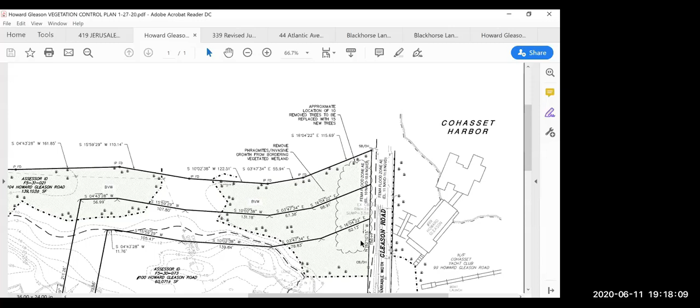The problem was with what the homeowner did and whoever he had work on it, we weren't aware this was done at the time. We found out about it after the fact, but when you mow down Phragmites at the wrong time, you can actually make them stronger. You have to specifically cut them at the right time when the plant is at its weakest, after it sort of foliates, not in the winter or late fall, where cutting it down could allow the plant to grow back stronger. So timing is important with how this gets done.

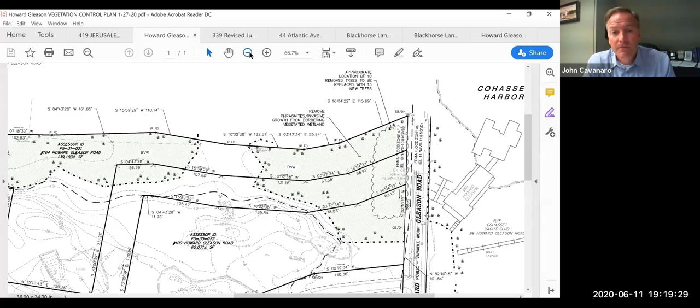Do you know when, John, do you think we would be able to have that? I think I could get it done probably within the next week or two. I won't be at the next hearing, I won't be available to attend. So the soonest I could be back would be the first hearing in July, but I could get that probably by next week. Okay, I think a detailed plan of the scheduling and what's going to be used would be helpful.

John, is there any particular reason why—I know there's an old order of conditions—but this whole area out here in the back, a good maybe 2 acres or so where Phragmites may be removed, is there any particular reason that all that wants to be removed or treated? It doesn't seem like it's blocking anyone's view or a nuisance at all. It just seems like it's there, in some really open space. So I'm curious as to the rationale of wanting to get back in there where it really can't be seen much, if at all, from anywhere.

Right, so a couple of reasons. One is honestly due to the lack of habitat quality that this monoculture results in. It completely overtakes any high quality native habitat whatsoever, so once it's there, it has no value. And it becomes a fire hazard, but more so—

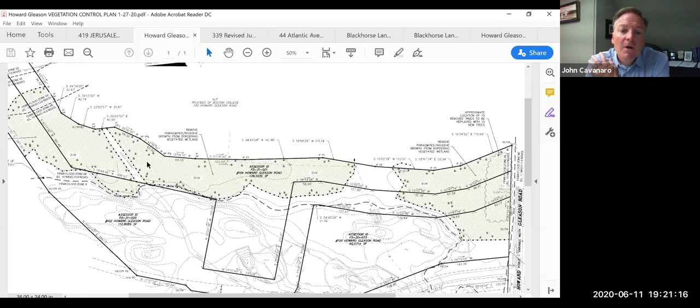We're fortunate that we have a break in the upland between these two stands, but the vegetation does spread. So the idea would be to eliminate all of it within proximity to itself so that there's less chance for it to recolonize. That's really it.

It's really not about a view. Go ahead.

Do you have a good feel on the first survey as far as the bordering property goes here, bordering the Boston College property, or the trustees of Boston College that goes along this line here, or would there be anything going up in that area? It seems like a pretty fine line. It actually comes up in slope, fairly steep. Not sure if it's at the actual toe of that slope, but that grade comes up fairly dramatically up to the Bellarmine property.

And so this is all pretty much in the BVW, in the wetland itself. Yeah, that's where Phragmites grows. So you're thinking, well certainly not today with the recent rains we had, but in a perfect world, maybe late July.

Yes, the proposed optimum time would be to begin the work. And that's when they think the Phragmites will be the weakest? Yes, after the tassels come out. And that's like the tops on top? Or is that when it starts? After that happens, the plant is at its most vulnerable stage.

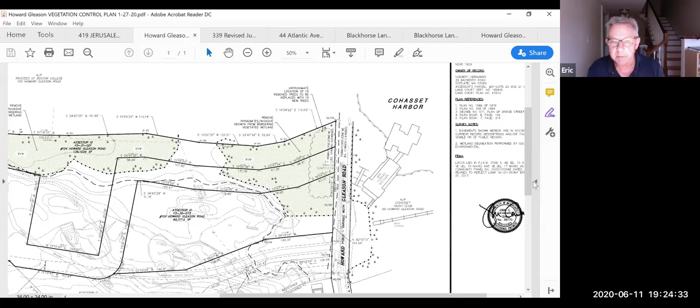And the pesticide you're going to use, John, is selective and is only going to damage the Phragmites and nothing else? Correct, yeah—it's an aquatic herbicide that has to get approved by DEP. It's essentially glyphosate, or a combination of other chemicals and glyphosate. It's been around for about 50 years—it's Roundup, John. It's Rodeo actually, but yeah, the active ingredient is Roundup. It's a carcinogen and all the other problems related to it.

So this is a very controversial—it's a controversial use, the glyphosate. It's been banned in California, I think. So is that going to affect any of the wildlife on that property? It'll kill anything it touches. Living creatures? I'm not sure about that, but any plant life glyphosate touches, whether it be Phragmites or trees or bushes or weeds, they're going to perish. You can read your own research on the negative effects of glyphosate on fish, small mammals, insects, and things like that. It's very controversial. I wouldn't say it should necessarily be banished, but it certainly doesn't get much favorable press nowadays.

Well, there's plenty of information out there about it. Most of the new information is negative. Okay, so time out, guys, here.

So I think what John had agreed to a little while ago was to provide a written report from either an engineer or someone more familiar with this, an expert in the field that would hopefully answer a lot of the questions that we may have here. So I think some of the questions we have will hopefully be answered, and we'll evaluate that report when it comes in, and we're happy to talk about that at the next meeting.

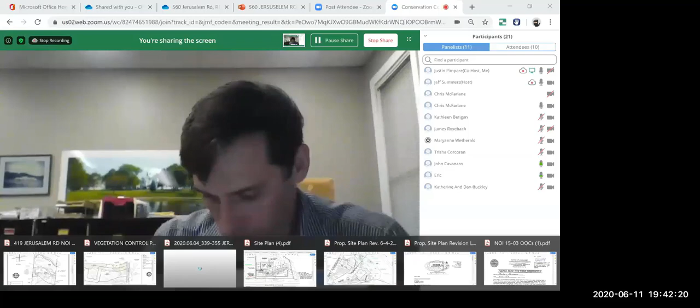This is a continued hearing from a previous hearing in May. Just to bring everybody up to speed, the commission did a site visit out there sometime last week, I believe last Thursday or Friday, and many of the members here tonight were present. This is a revised plan - hopefully I have the right revised plan up here now. If there's something else you want me to put up, John or Sean, please let me know. I think this is probably the plan you want us to work off, but if there's something else, let me know. I'll leave this right here and turn it over to you, and if you want me to share anything else, just let me know.

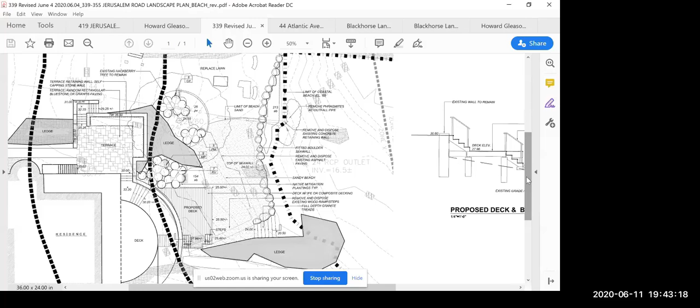Great, well thank you for putting up the plan, Jeff. Again, members of the commission, my name is John Cavanaro from Cavanaro Consulting in Norwell, and I'm here on behalf of the landowners, the Means, at 339 Jerusalem Road. As you mentioned, we had a site visit after the last hearing, and I think it was very helpful to see the site in person. Sometimes it's hard to differentiate some of the layers on these drawings in two dimensions. So we were able to identify that bituminous paved area, we looked at the existing retaining wall, the mature hackberry tree, we looked at the terrace area and the reconfiguration with respect to the positioning of the existing stairs, we looked at the deck. We taped that off, and I think we had a good feel for the scope and the size of the project.

Throughout the discussion, we got a sense that it may be beneficial to revise the plan slightly. We originally were not encroaching within the limit of the beach, but we extended the separation between the back of the beach and the face of the new retaining wall, bringing it deeper into the property by a couple of feet. Originally we were siting that large outcrop as the face of the new retaining wall with an arch between the ledge outcroppings. So we've kicked it into that large rock outcrop to create more separation from the back of the beach to the face of the wall.

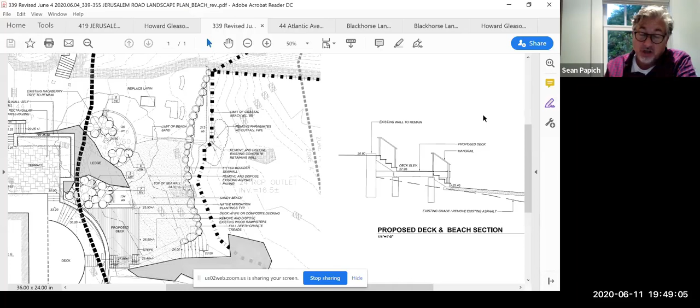John, did you ever determine what kind of tree was near the pipe? There was a large tree at the end. No, Maryanne, this is Sean speaking. We have not as of yet, but we'll do an inventory of all the plant material that will lie on the coastal bank side of the proposed stone seawall. We'll catalog that and make sure we know exactly what everything is, keeping all the native plants that are there. We intend to keep that large shrub, small tree, it was a little bit toward the north side of where the existing Phragmites was. So we intend to hold on to that plant. Anything that's on that side of the wall, we'll look at.

There are some other invasives in addition to the Phragmites, some honeysuckle and others, but we'll hold on to all the native, indigenous plants that are there.

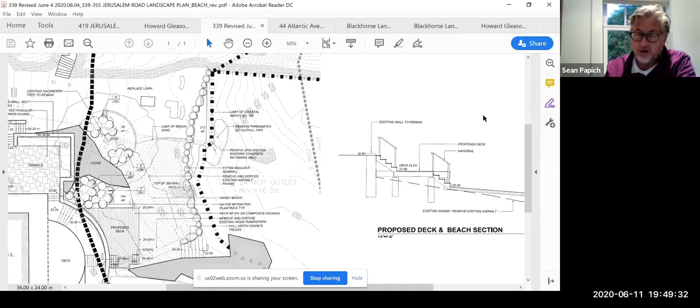John, it's my understanding that the Phragmites will prosper where you have the proper environmental conditions. How are you going to change those? How are you going to prevent the Phragmites from coming back in the future? You have the fresh water source, it's soggy, you have an area that's not going to be tended. What's to keep the Phragmites at bay?

I think honestly, hand pulling them on a regular basis. I don't think they've ever been touched, ever. There's been no maintenance out here whatsoever. Yeah, it's almost akin to cleaning the beach, you see what kind of debris and refuse is out there. This property has new ownership, and the plan is to maintain it and rehabilitate it to keep it in better condition. Everything takes maintenance, but the patch is small enough that it's manageable. It's not acres of Phragmites like the last job we had.

John, looking at the diagram we have here, could you describe where the edge of the asphalt is? I can visualize it because we were there, but I have trouble seeing that same edge in the drawing.

Sure, Sean, do you want to— can I grab the screen? I'm not sure if— I don't know if you could show where the edge is and also the rock outcropping. Yep, that was below that. Oh, I've just lost everything. No, hold on a minute, I have to do some— who wants to share this? John or Sean is going to share?

So for people that were out there, I'm happy to go back and actually show the photographs if that's helpful to anybody. I can show the photographs on site — would that help anybody? It'd be good, Jay, if you could. Please, yeah, bear with me here.

Hopefully you can see — there we go, there's probably a better one here, but I'll stop right there. Make a mental note, going back to the diagram, John referred to this as the hockey stick. This was the ramp that comes down and over, and the pavement follows along in this area here. I'll jump over to see if there are some other ones as well. And then, of course, this is where the Phragmites were, and the outfall pipe — it's over here somewhere on the other side of that wall.

And here's a better one — so here was that ledge outcrop. As far as the new stone wall, or boulder wall as we're calling it, John, does it start right down here at the end of the hockey stick? A little further down — the steps start there, Jay. They go down, and then the wall is at the end of the stairs, and it'll cut across sort of the first third of that boulder. Not behind the boulder, through the boulder. Yeah, through it.

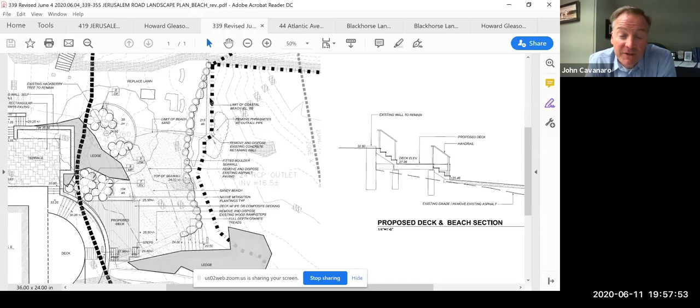I think the issue, Maryanne, is really that we're doing more than just replacing the wall here, as Chris was saying. We're taking the natural area below the asphalt and converting that from something wild and natural into a sandy beach, now to the west of the boulders. Am I incorrect, John? Well, we're actually removing a retaining wall that's failing and eliminating lawn adjacent to the beach, and we're creating more resource area potential for the beach to grow to the face and toe of the new retaining wall.

John, I was talking about to the west of that and south. If you look to the right of the asphalt, there's an area that's sort of natural wild growth between what was the former asphalt and now the new boulder wall. Let's go back to the photograph to look exactly at what it is.

Okay, hold on, let me go back to the photos. So, the boulders are going to start right along, let's say, the L. Is that not correct? What are we thinking? Right, yeah, that's where the wall's going, right there, the stone, all the boulders.

I don't think the beach where the stone beach is now will repopulate into stone, I don't see them getting a beach there. No, that's not what Eric was referring to. He's referring to what gets filled in behind the wall. When the wall gets built, the idea is that there would be a sandy beach behind it.

I would propose that the boulder wall run along the edge of what is currently asphalt, and the hockey stick runs straight across to where the crumbling wall is by the Canada geese. Come straight across and leave all that naturalness and wild growth down below, which is part of the natural flora of our beach.

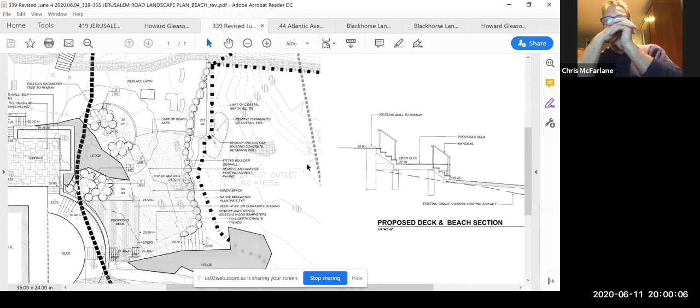So I'll chime in here. My feeling is, obviously, clearly there's a lot of work being done in the 50-foot buffer zone. However, I don't want to get into a long dialogue about the 50-foot buffer zone requiring a variance and the amount of work here. I think there are some things I see that are certainly an improvement. It's very unfortunate, and we saw this on site at, was it 485 or 495 Jerusalem, up the road a little bit a couple months back, where there was also a storm drain from up on the hill that unfortunately went through the owner's property and was affecting the rock wall out there.

So, to rebuild this wall here, I really have no problem with that. I think cutting it back a little bit is probably great in giving back some of the beach here. I think certainly the removal of the pavement here, which I think we're all in agreement with, is a huge benefit to the environment and will restore, and not allow that asphalt or any more crumbling or rock degradation to continue to occur right out onto the beach there. There has been some improvement with some native plantings here.

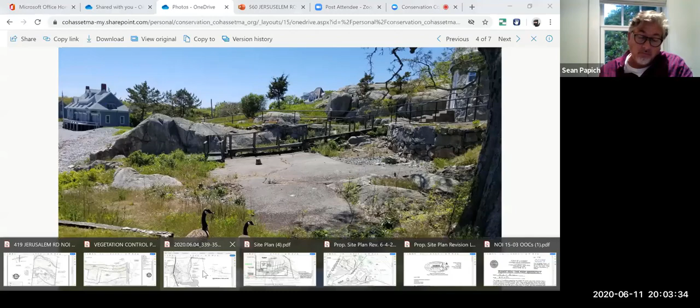I understand your point about bringing the wall back more. One thing I'd like to mention is that since the first meeting, we put together a larger scale landscape plan with more detail visible to the eye. We added about 370 square feet of plantings in the area at the Hackberry, right where the cursor is now. We had that for the site meeting, but not at the last meeting. So we kind of doubled the amount of plantings, if not a little more, from what was shown next to the deck previously. I just thought we should note that that hadn't been discussed.

Yeah, I think that's another improvement to this all. I don't want to set a precedent about rock walls here personally. I know we treat each application on its own merit, but we did approve a rock wall up the road a little bit. Again, there were extenuating circumstances given the storm drain there.

My comment is that I'd be ready to approve the project if I just saw the stone wall come back a little bit. There's going to be a lot of sandy fill in there—I'm not sure the exact amount, maybe 2 to 3 feet spread across this area. It's certainly in the hundreds of cubic yards of material being brought in. I don't know the exact number of cubic yards of fill, but it's quite a bit, I know it's sand. I think if it just pushed back a little on the other side of this ledge, we're giving away a lot. Again, I'm willing to support the project if this rock wall were cut back just a little bit. That's all.

I'd be more willing to support the project, Jay, if the rock wall was pushed back a lot. This is a project to remove some faulty, falling apart, unsafe, man-made materials—the asphalt, a wall. It's not, as I see it, a project justified in removing natural vegetation and converting it to beach. I would like to have that natural vegetation stay. I see the natural vegetation running along the eastern edge of the crumbling asphalt, coming over to where the Canada geese are, and everything to the left of that should stay the way it is. Take out the crumbling wall, and then you'd have your boulders going out, replacing the crumbling wall we see in the lower left-hand corner.

That would eliminate the negative effects of the crumbling infrastructure that man has put in there. Yeah, well, given that, I still think you're getting quite a bit of beach here, quite a bit of sandy area along there. I'll point out that along this area there are some plantings proposed, but that still allows for quite a bit of sandy beach.

So what about if we go back to the plan? Yep.

So tell me when that's up. Right, it's up.

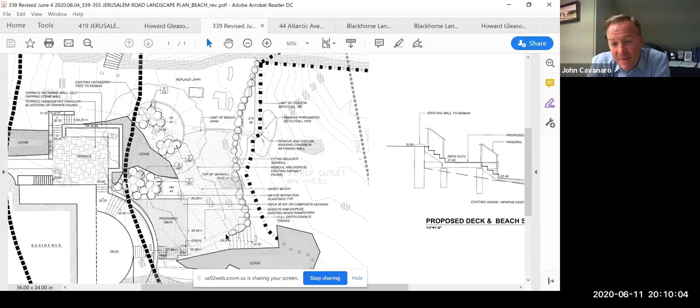I applaud you for bringing that back. You know, I was not looking to have the wall come all the way back over where the existing lawn was. I was just more concerned about it down this way. So essentially, we're going to kick it back to the back of the ledge instead of the front of the ledge, and then return it back.

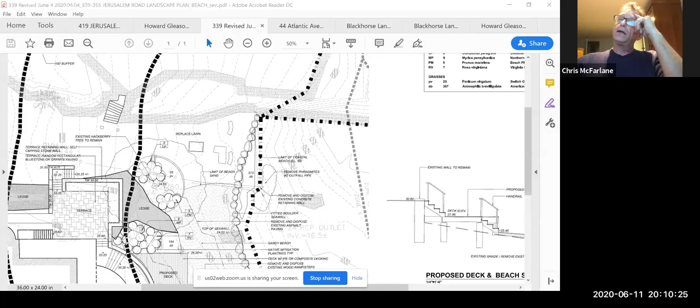Jay, on the top of your screen, do you have view options that you can give? Is there one that says allow viewer to annotate or something like that? Hold on a minute, let me share this. Hold a second here. You know, tonight's a lot different than other nights on this. I would love to be able to share it, but I don't have that capability here. Jeff, wait a minute, I don't know how to share that either, Jay. Sorry, again, I've built a million Zoom platforms and it's not allowing us to do it.

Certainly something to look forward to or iron out here moving forward. Any comments on that? I mean, it sounds like we're close to trying to move this forward here with a condition, and I'm happy with that, and I'm good with that.

John, how long? First of all, are there any comments to the proposal of having a revised plan based on the comments we've just discussed?

Jay, what you're saying is almost unintelligible. I apologize for that. Very good, there, you're doing better. Can you hear me now? Yeah, all right.

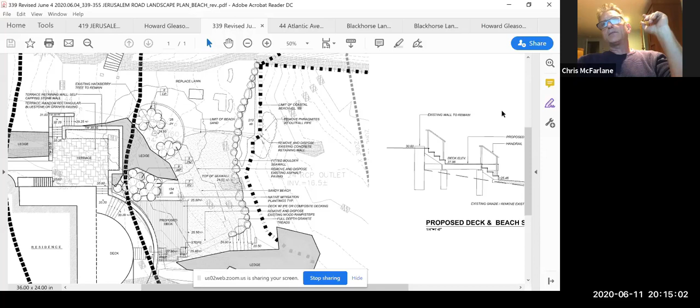We can do that. We can document that. We would intend to document that for you. Even if it's as simple as an outline like you've done for the ledge, with a hatch over it that says this area of planting to remain, or a limit of work. I think we talked about that early on, that he was going to do that. We did. That's acceptable.

Okay. All right, any further comments here?

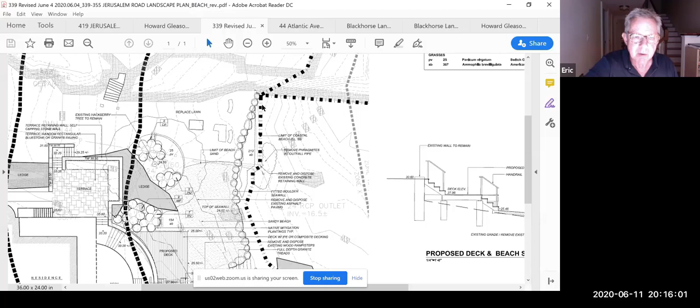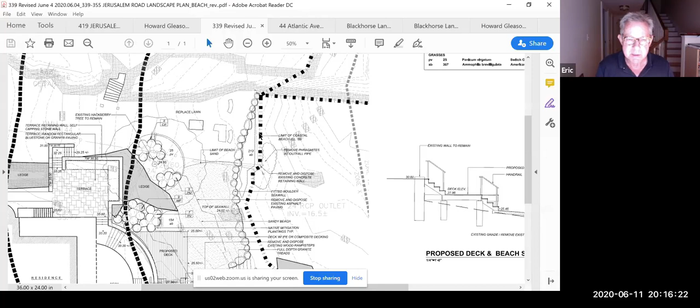It's an area that lacks definition right now, and I think we need some clarity as to what's going to be there afterwards. Okay, including the new position of the boulders. Correct. Right, yeah, I have a couple of conditions here which I'll restate in a minute, but before I do, I want to ask Jeff for any additional comments.

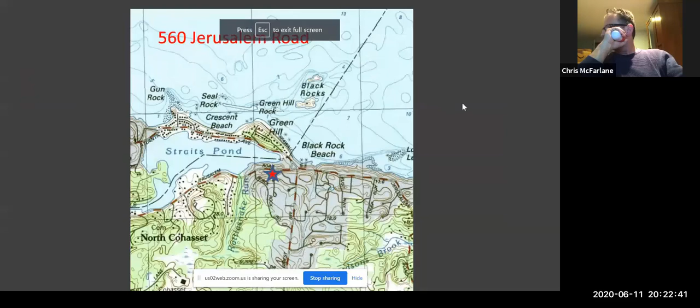Good evening. So, just so you know, I did read into the record already the notice of public hearing, so no need to go do that again. David, if you weren't with us earlier, I did read into the record the notice of public hearing. I believe I did, so we're good to go.

We're just coming back to 560 Jerusalem Road. And just for the record, David, your name and affiliation, and I'll turn it over to you. You just let me know when you want me to skip to the next slide here. I believe we also have some pictures, and I'm happy to go from here.

This should be fairly brief. My name is Dave Crispin. I'm a civil engineer and land surveyor with the BSC Group. Kathy and Dan Buckley are with us also, the new owners. They purchased this last fall. Believe it or not, Jeff and I walked this site last fall, so it took a little while to get through the process and figure this out. We are at the eastern end of Straits Pond on the southerly side of Jerusalem Road.

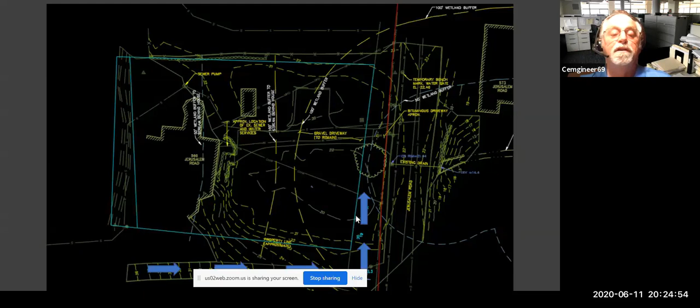This is just a screenshot of the CAD file, but what I want you to see at the bottom of the screen is a driveway that goes up the hill. Those blue arrows represent the surface runoff that comes down the driveway, takes a left, and goes right into the front lawn of the Buckleys.

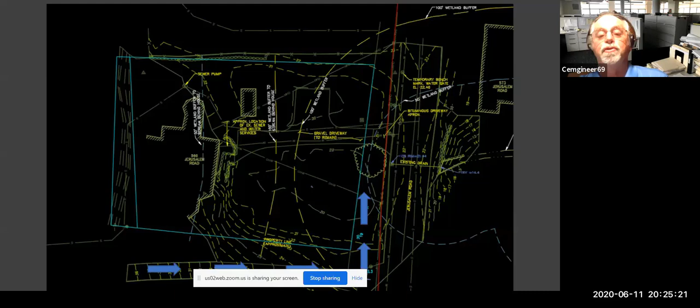It's kind of because of the way they graded and paved the apron at the bottom of the driveway, but it's not a big deal. It's easily solvable, and to deal with that we thought we'd just leave well enough alone and take care of the problem for the area. So the next slide shows you what happens. If you can go to the next one.

That's a pretty cartoonish representation of what the front yard does pretty much every spring and winter. It comes down and it does not percolate. The soils there are terrible. We looked at the test pit logs from the old septic systems, and it's basically till. So that front elliptoid there is a bowl, for lack of any better term.

Not to put words in the mouths of the abutters, but I think the words were tired of looking at the flood that sits there ad nauseum, not to mention the detriment to the front lawn, because it does in fact kill the lawn many seasons, many years each season.

Next slide. So what are we going to do? You remember the driveway coming down the bottom of the slide? We're going to build a little 2-foot wide cobble channel into a forebay. Not that they sand that driveway heavily, but there was evidence of some sand.

So I thought we'd do the right thing and put a forebay in there and trap that sand. Then it overflows into a rain garden, which is about 18 inches deep. And then there is a 4-inch diameter pipe coming out of this little yard drain. I'll show a picture of that next.

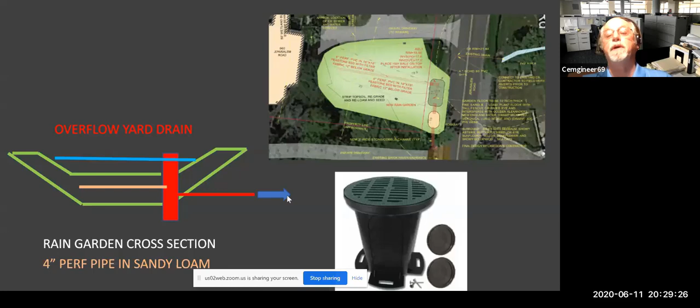The orange line on the cross section on the left is that subsurface drain that would let the water soak through the sandy loam and come out, and then it goes to that pipe that we know is there. We're going to have to discover that when we get to a construction stage, but we know it's there. We know it's 43.5 feet from the end of the pipe. I think that's it in a nutshell. The next one just says questions.

Okay, thank you. So we're hoping for a negative determination if that's possible. Jeff, I know you have some pictures.

I don't know if it's worth sharing the pictures, but I'll go back here a little bit. The pictures right there really kind of say a lot. Jeff, comments to this one?

The only reason that we're in any buffer zones here is because across the street on the other side of Jerusalem Road is an intermittent stream, and behind the house is a small intermittent stream also. So those are the closest resource areas, and that's why they're here at all.

I do like the water treatment, I think it's great - the forebay to trap solid particulate matter, and then the rain garden to reduce the pollutant load. I don't think a lot of people would include that, and I'm happy to see that here in this proposal.

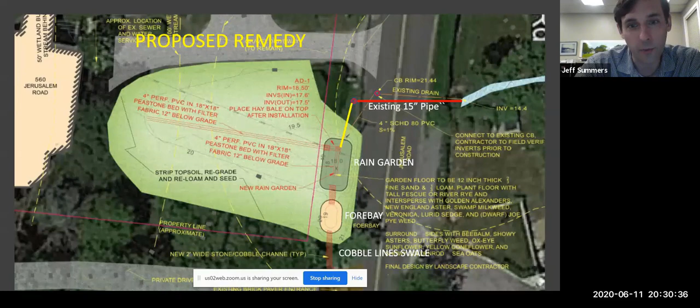I don't live too far from the house, and I've seen this at its worst. I probably walk by here at least once or twice a day, and certainly applaud you for trying to take care of the water. I know the water comes in from a couple different angles here and unfortunately hits that low-lying area in the front yard. So I agree, I'd probably want to be doing something over there as well. Good for you to try and remedy the situation here.

Comments from the commission? Any other comments? Yeah, I think maybe I missed something here. You have the existing pipe - I believe you said it's 43 feet long. 43 feet from the right end, right there where Jeff just had it. There's a head wall over there. What's at the far end of the pipe?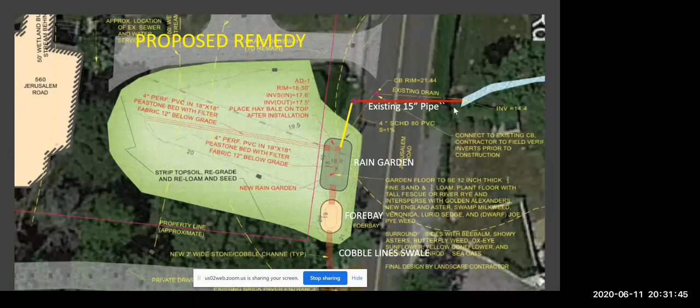I missed that - to the left or to the right? To the right, over here, Eric. That's the intermittent stream that flows down to the pond. Okay, so you'll be dumping the water that's currently collecting on the lawn into the stream directly. Exactly. At a very controlled rate.

I kind of suspect that at the left end of that, when we get to it, we're going to find some kind of a dry well or something that was probably put there, I'm guessing when they built Jerusalem Road. I don't know what we're going to expect. The pipe is vitrified clay, 15-inch. I haven't put any of that in my lifetime, and I've been doing this for 45 years, so I think this is a pretty old pipe.

I've passed this property for a number of years, and it's always been a view to see all that lake out there, so this is an improvement, it looks like. And second, the plan - this is a really nice plan. I just have to comment on the engineer on it - we don't usually see it so detailed, and I really like how it's explained. I hope other people would continue to do stuff like this.

Third, I just wanted to know how much elevation do you think you're going to be putting in, the grade, on the lawn? Around the perimeter it does not change at all. In the center line where that reddish line going left to right is, we're probably going to change it from 4 inches to maybe a foot at the far right end, and the rain garden's a couple of feet deep. I'm thinking there might be 75 yards worth of earthwork here - we'll strip the topsoil, stockpile it, regrade it, take away a little bit, and put it back together again.

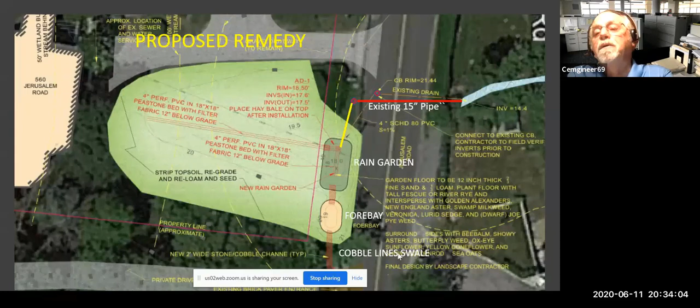Just a reminder, the rain garden has to be maintained forever - the homeowner has to maintain it to keep it working, it doesn't just stay that way. There's an obligation, this is true, and it's designed intentionally for minimal maintenance. These are perennials that would be in there. Like I said, I don't expect a lot of sand coming off of that private driveway. My discussions with the Buckleys were that the forebay, they might get a wheelbarrow of sand every 4 or 5 years. It's not going to be a big, huge maintenance item.

You'll know if there's a failure with the design when you start to see the water backing up all over again. Hopefully that doesn't happen.

To be clear, if we get a 5-inch thunderstorm, there's going to be a puddle in the front yard. It just might take a day to go down instead of 3 weeks. There goes your ice skating rink. Lake Buckley, our friends call it - not lovingly. We haven't mapped it yet.

Any further comments here? All right, Jeff has requested a negative determination. Is this a negative? I don't see any conditions being placed on it, or not hearing any. Jerry, sorry, I was muted.

I have a couple questions real quick. You mentioned that if there was a certain size storm it would still take time to get rid of. Is that because of the capacity of the 4-inch pipe leaving the rain garden? Yes, it's only a 4-inch line going out of there on purpose, very restricted. Have you calculated how much volume a 1-inch storm would actually create? We honestly didn't go to that expense for this.

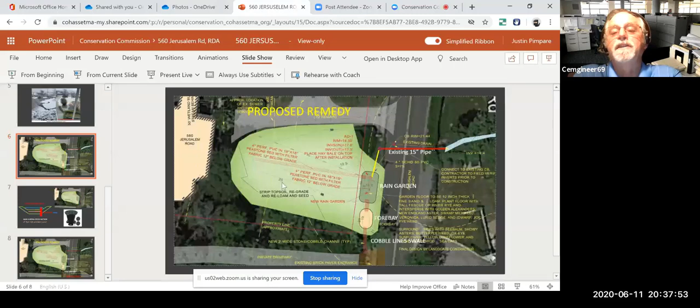When the house was built, I'm guessing they diverted that stream maybe to this culvert, and pushed it off to the north, or to the west rather. There's so many streams going back here - of course you have Rattlesnake Run, but there's so many areas that are wet that come off the hill and the hillside that flow down through there. It's tough to say.

Okay, all right. Any further comments? No. All right, Jeff, I'm not hearing any special conditions being placed here - is that just a negative 2? Jeff, you're muted. You're muted, Jeff.

So, sorry about that. I just wanted to say there's no comments in the Q&A regarding this, and it would be a -2.

Jay Pimpare, I'd like to make a motion to issue a -2 determination on the RDA for 560 Jerusalem Road.

Do I hear a second? Seconded by Chris McFarland. We'll do this by roll call vote. Jay Pimpare, aye. Chris McFarland, aye. Eric Eisenhower, aye. Marianne Weatherald, aye. James Roseback, aye. Trish Grady, aye. Okay, that vote passes 6-0.

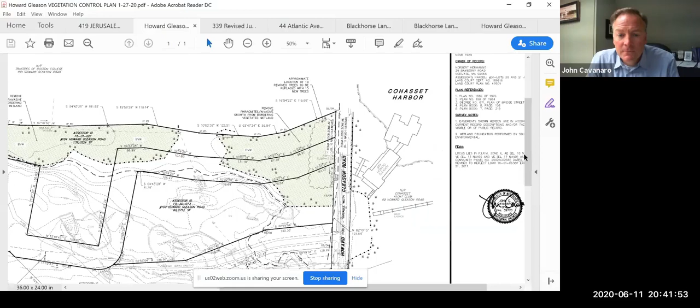All right, John, I've just punched up the site plan. Let me know if that's sufficient for you. Is that good enough? Yes, perfect. Thank you, Jay. Okay, I'll leave it right there. Thank you.

Thank you, members of the commission. Again, John Cavanaro from Cavanaro Consulting in Norwell on behalf of Barry Cohen, the owner of 419 Jerusalem Road. The Cohens purchased 419 recently, and we filed a notice of intent to do some work in the front of the property. This is an ocean-facing property that has a coastal bank on the ocean side, back of lawn. Between the top of the coastal bank and floodplain, there's a pool, landscape, then the back of the house, and then we're on the front side of the house that faces Jerusalem Road. The lot slopes up from the dwelling to the road. This is a Royal Barry Wills Cape home that sits sort of mid-span of the lot.

So the resource area, as I mentioned, is on the back side of the house. All this work is on the front side. It'll be accessed from the existing paved driveway, and there are a couple of small additions going from left to right. There's about a 150 square foot addition that will be located conforming and within the side yard setback. It'll be a one-story addition located within 15 feet of the side yard. So that's a conforming addition. No other relief is required there.

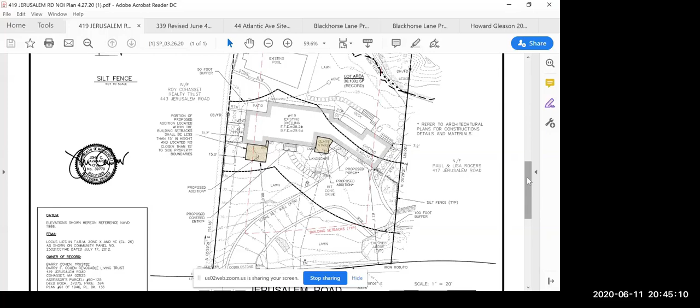All right, Jeff, comments on this one? So I just want to echo what John said. It's a minimal amount of work, and it's already into built areas - the atrium, the steps, the one addition into the lawn, which is on the other side of the resource area, and then the deck.

While I'm speaking, I had a quick question for John. What's that deck going to be like? Is it going to be a suspended deck with a couple of sonotubes, or is it going to be flat on the ground? So the porch? Yeah, the porch. Yeah, so that's just sonotubes, it won't be a foundation, just suspended on sonotubes.

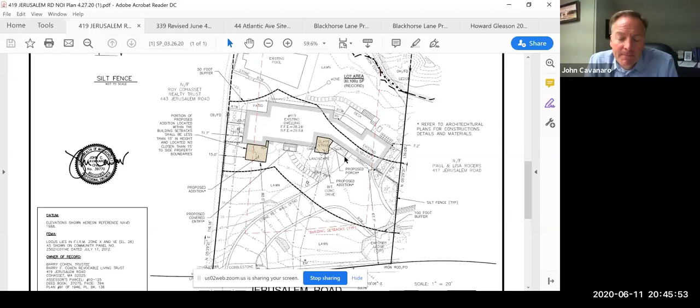Okay, and then the little bump out here. Correct. Okay, so it's all one story. Will they just have to cut into the roof line here, John? Yeah, so we cut into the roof line a little bit, but not exceeding the overall height there. It won't be triggering any zoning relief, correct?

Yeah, sorry Jeff, I didn't know if you had any further comment. No, okay. My quick comments - this is a beautiful home. Everything is pretty much outside of the 50. As John mentioned, it doesn't require a stormwater permit because it's below the threshold. If you've been by this house...

It was one of three houses in a row. The other two were unfortunately knocked down and rebuilt, and what the middle one looks like right beside it. When I saw the for sale sign go up on this one, my first impression was, oh no. If the new owners please keep this house as best they can, selfishly speaking. So I applaud the new owners for keeping the home pretty much as is with minimal work. And thank you to the homeowner if you're out there listening, for not knocking this down and building something other than what's currently there. I really don't have any comments to this project personally.

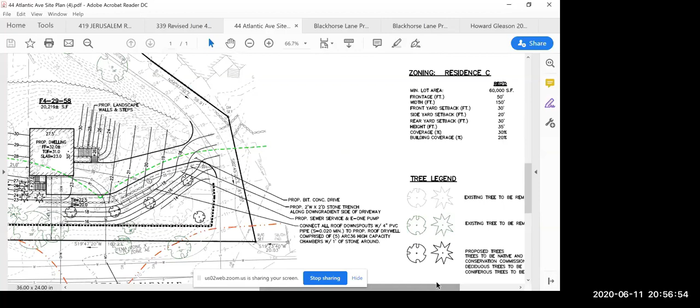So Jeff, going to the tree legend, the color green there. So these trees, the larger trees in the front, will remain. Can I make a comment moving forward? Can you make these a pink, brown, or blue, some other color to make a better distinction between what's to be removed and what's to remain? It's tough to point them all out. I see the 50-foot wetland is red and we've got green, and the red really sticks out. So moving forward on these plans, before I forget, color code these in clear bolded colors that stick out for what's to remain and what's to be removed. Sure, yeah, we can do that in the future.

Jeff, before I open up to other comments, Jeff Summers, comments on this one? Jeff, this is Maryanne. Well Jeff, this is Maryanne.

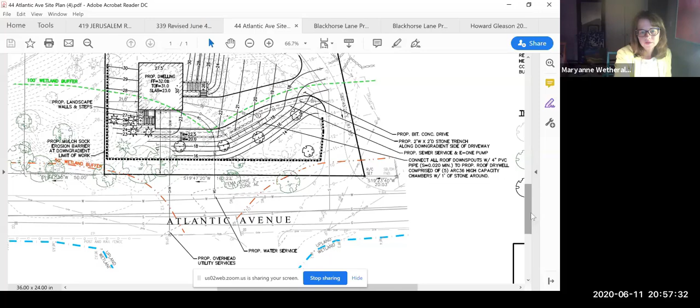What is the dotted line here right before Atlantic Ave? Is that the stone wall you see along Atlantic? There's a stone wall that seems to be about where the property is. If you look at the 50-foot wetland buffer label in red, directly below that is a stone wall line type. So then what's this dotted line? That bold dotted line is the limit of work where there'll be an erosion control barrier. That's the silt sock right here. Oh okay, the silt sock coming around.

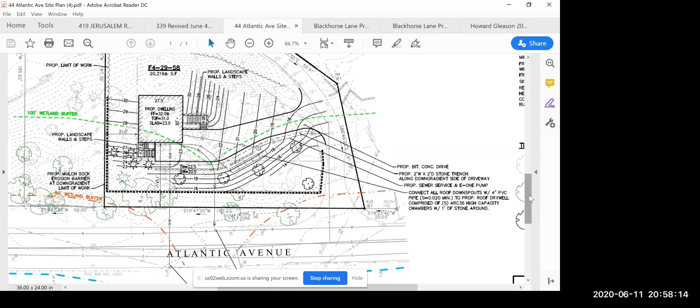I know it's hard when you drive up there to actually see it. So the rock wall you're referring to is right over here, and then that existing driveway. The existing driveway comes up and goes around to a house out in the back. It does a loop and comes back to Atlantic Ave.

Yeah, there is so much ledge on this property. I was kind of surprised by this one. It's a beautiful ledge. On top there's a stone wall, like on this property. There's a cement wall, seems to be holding back the property. As you go up the road, is there going to be any work done up there as you proceed up higher?

No, that lawn area, you can actually see the retaining wall shown on the plan. Those retaining walls were built when they put in a septic system for the abutting house, which is now connected to sewer. And for the most part, that land is off-site.

So I see that's still part of the property, the proposed limit of work. So for all commissioners, see the proposed limit of work, Jeff has it, the squiggly line here I'll call it. There's no disturbance in this area, the two trees shaded in green are to remain. That retaining wall up here will remain, and again this whole area will not be disturbed at all. The limit of work follows this squiggly little line here. Right, I was just concerned about the shifting of taking away so much.

Yeah, seems like, how are you going to be blasting to get through into this driveway? Or what's your plan? So the driveway will be filled. There's a flat area at the base of all the ledge in the back, and this driveway when you come up is in an area of fill. The only ledge removal is a small amount for the basement of this house. The grade's coming down about 2 feet.

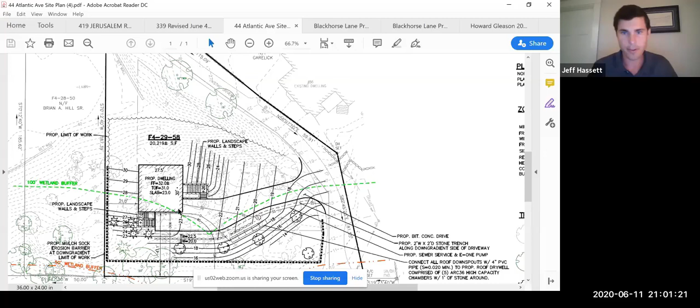And you're along a scenic road too, so you can't clear between 5 and 15 feet unless you get the planning board to approve of that. Have you talked to them? We have not spoken to them, but we are not working within the front part right along Atlantic Ave. We're keeping that wooded area between the street and the work area.

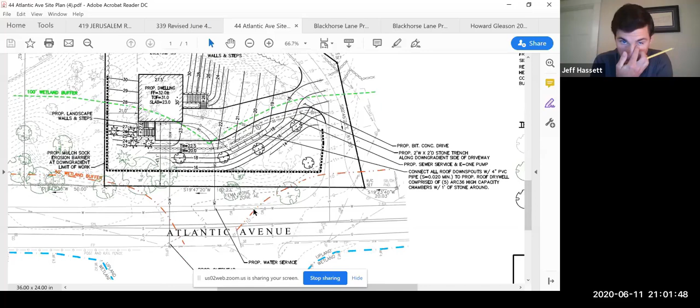Yeah, I think looking at this, I don't have the scale here. I'm sure the scale is off at the bottom point. It rises up a bit, I think. Yeah, so there you go.

So what's a 1 to 20 scale? I think you're talking at least 20 feet from here to there, Jeff. I mean, if you want to get a ruler out, or know that offhand, but it looks like you're at least 20 feet from the road here before the actual clearing starts, or at least where the silt sock is. Yeah, I'm getting about 22 feet from the edge of pavement.

Okay, so good comment, but hopefully it doesn't really apply here, thankfully.

How big is the house again, Jeff? 20 by 30? 30 by 27 and a half. 30 by 20, so we're a little less than 900 square feet, and with 2 floors? Yeah, story and a half.

So to get into the house, you're actually going to have to, I assume, is there a slab, an underground garage, or a garage on the bottom floor? Yeah, there'll be a door right there into the basement, and then those front steps and the rear steps will be hardscaped walkways going up 8 feet to the first floor.

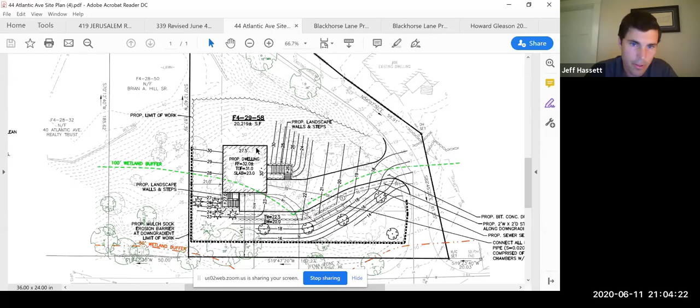Yeah, so the high point in the property is right where the proposed limit of work is. So you have about 30 feet of runoff coming towards the house. It won't be a ton of water, but it certainly is something to be concerned about. It will be kind of the fine grading to divert the water around the house, and then also waterproofing the basement.

Definitely. Yeah, the intent of the applicant is not to finish that basement. In fact, it'll probably have the foundation just pinned to the ledge, so there'll be an exposed ledge on the uphill side. Yeah.

So where is the drain? You have roof runoff going into drains on 4 corners, or can you go over that, or the mitigation of where you're directing the water to is?

Yep, so there will be downspouts in the front, I guess the corners closest to Atlantic Ave. It's only a 30-foot run, so you can pitch the gutters from the other side of the building to that side. And then from there, it'll be piped with a 4-inch pipe to the drywell system along the edge of the driveway.

Do you think that will capture everything, or do you need more than that? That will capture all of the runoff. It will overflow at the downspout right at the corner of the house during bigger storm events. So the intent of it is to make it big enough that we're reducing the amount of runoff from the property. We don't have to hold back all of the runoff from the roof.

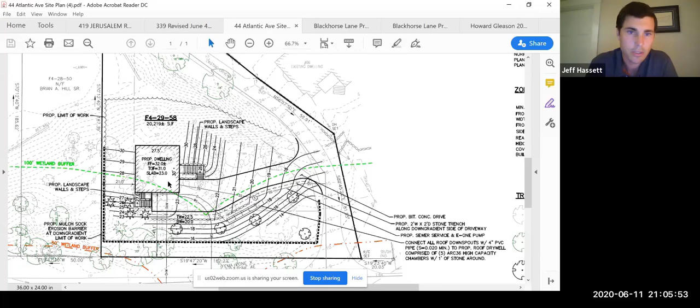Jeff Summers, comments on this one? So I just wanted to say that the resource, going back to the resource area, it's on the other side of Atlantic Avenue, is Treats Pond, and the actual wetland is basically a buffer to Treats Pond. So that's what the actual resource area is.

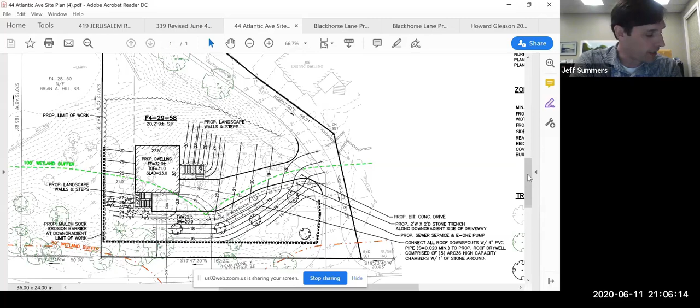As Jeff Hassett said, the entire lot is vegetated as is, and you can pretty much assume everything will be removed in that limit of work area. The vegetation along the front edge will remain, and then they'll have whatever was not the 9 trees planted along the roadway, I guess probably for privacy eventually. That was the only comment I have.

There is a question from the audience. I don't know if you want to wait or address that now. Could I speak first, please? Sure.

So, could you explain to us in simplest terms, you have a heavily wooded site which you're removing, my quick math, 220 inches of caliper of trees in I think you said 17 or 19 trees. And I have to assume, and maybe erroneously, which is why I'm asking the question, that the land is kind of reclassified for stormwater management when you take down that many trees. Am I correct or incorrect?

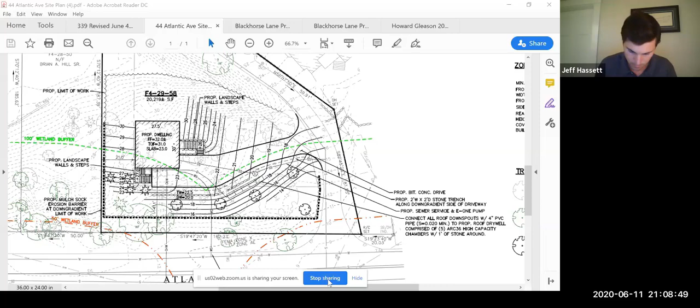We have a comment from the audience here, and I know I stopped sharing my screen. It's a comment from one of the abutters. A couple questions here. I'll read the questions in the comment and we can circle back. The first question was how many trees will be removed? The second question is where will the runoff go? And then the comment is Treats Pond has caused serious flooding at 91 and 95 Atlantic Ave for many years. The flooding continues today. Any new construction and clearing should be held off until the flooding issues at Treats Pond are resolved. So if we could just go back, Jeff Hassett, and answer those.

How many trees will be removed? I think you already stated that, but if you could for the record again. Sure, 17 trees will be removed. The roof dry well overtops in a 10-year storm. It does not overtop in the 2-year storm. And the calculations show that the volume and the rates of runoff to that pond will be reduced as a result of this project.

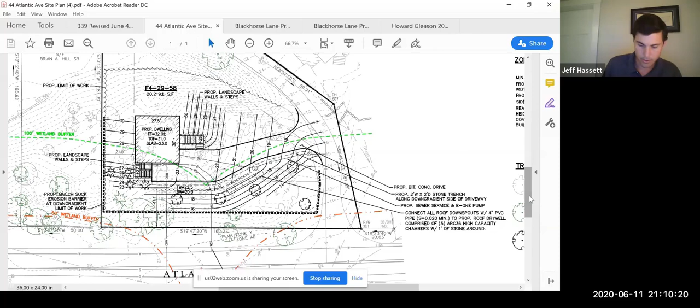I'm going to go back to sharing my screen. What will the volume go from what to what? So in the report, following the narrative of the standards, standard 2 being the peak discharge rates and volumes. Right, and we calculated for the 2, the 10, and the 100 year. But to give you a summary, the rates are reduced by 12% and the volumes by 20%.

And what storms will that be, Jeff? Is that the 1, 10, 100? Can you break that down, please? The 2, the 10, and the 100.

Okay, so for the 12%, what was the volume that was reduced in the 2-year? I'm sorry, you broke up. What's that? What was the volume of water that was reduced in the 2-year, 10-year, and 100? Can you break that down, please?

Sure, so for the volumes, the units are acre feet. For a 2-year storm, it's reduced from 0.039 to 0.026. In a 10-year storm, 0.067 to 0.051. And in a 100-year storm, 0.135 to 0.116.

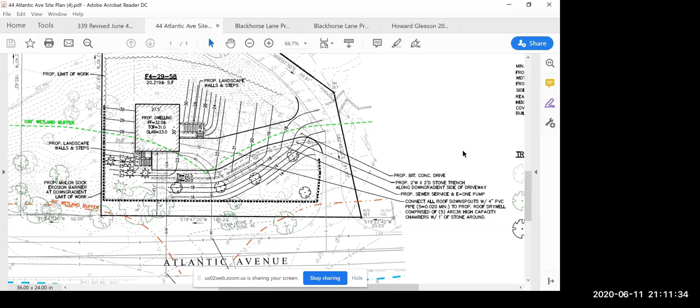And was that a 12% overall, or where did the 12% come in? So what I read you were the volumes, and that was a 20% decrease. And it's, I guess, the sum of all of the storm events, an average of the 3 storm events. Okay, okay.

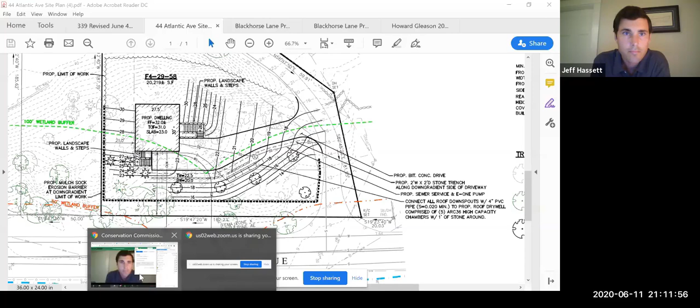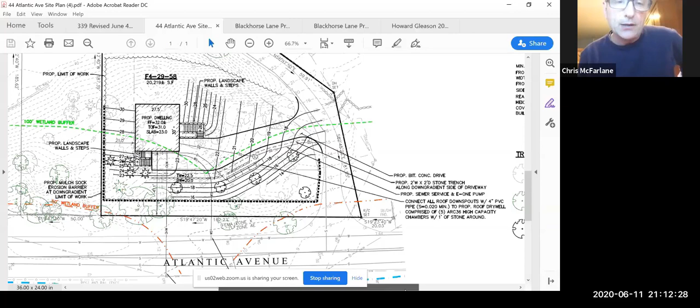So I'd like to follow up on the tree removal again. Besides what Jay had said earlier about coding it a little more clearly in the future, I think it's important that we start to hold to the requirement of the bylaw that the trees are identified on site, not just by size, but also by species, so we can look at them more carefully. Like I said, there are 220 caliper inches of tree being removed on this site, and it's being replaced with approximately 30 inches of tree. I think that the applicant could certainly do more.

The entire backyard of the site is void of any replanting. While that happens to be outside the 100-foot buffer, it just seems like, as a good neighbor, you would try to do something to help mitigate all that removal.

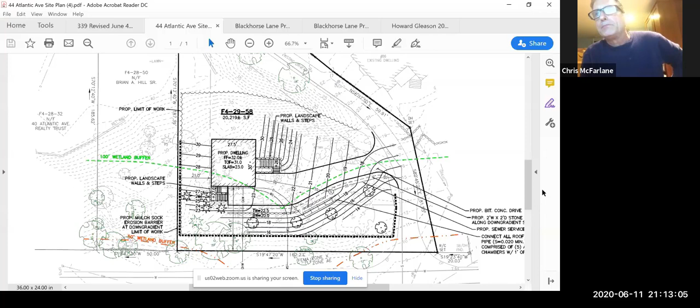Sure, so in this case it's a very small work area, only about 9,000 square feet. Along the front of the property where we're replanting, those trees are 25 feet on center, so there's not a lot more room to fit trees in that area. In the back, although it's part of the work area, it's a large ledge outcrop that's significantly tall, taller than the first floor of the house. The first floor is at elevation 32, and that ledge in the back goes up to elevation 40. You really could not plant on that slope, it's clean ledge.

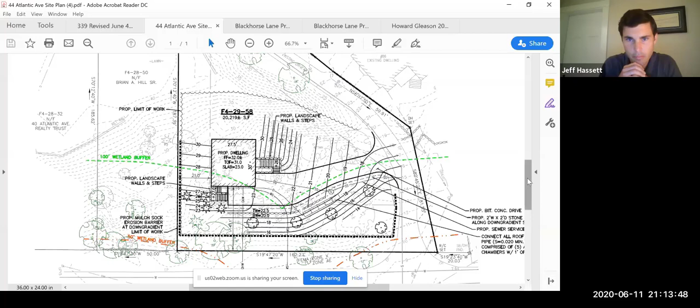Can you add more vegetation or trees in the front then? I see you've marked a few, but if there's a problem going into Treats Pond, can more trees capture some of that water? Yeah, we could probably fit 2 or 3 more in there, but it's just a small area. The trees right now are 20 to 25 feet on center, so yeah, if we could certainly fit a couple more in.

Is there any way to control the runoff from the actual pavement? It looks like it slopes down from a 23 gradient down to a 16, and it significantly drops off down to the road. How is the driveway pitched? Is it pitched down, pitched up? What's happening? I assume it's probably pitched down.

Yeah, Jay, you're breaking up pretty badly. Jay was asking about the pitch of the driveway, where it's pitched, or what can you do more to capture the driveway runoff?

The driveway is cross-pitched with that stone trench on the downhill side. On other projects we've done one of those trench drains across the end of the driveway to really capture that last portion. We could add that if you'd like. The property naturally slopes toward that stone trench. The driveway's pitched over to catch the stone trench that runs along the driveway. Water comes over, hits the stone trench, and hopefully infiltrates into the ground before it actually runs off down onto Atlantic. It's a pervious driveway, I assume?

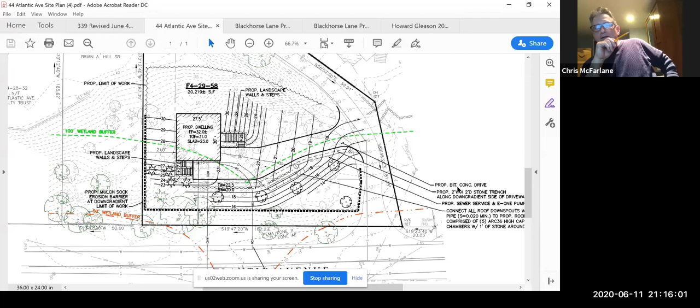No, impervious, it's asphalt. But you said the stone trench was connected to the infiltration, correct? The stone trench and the roof drywell system are two separate items, not connected.

You're breaking up, Jeff, there. Sorry, I don't know if it's the connection or me, but I'm having a hard time hearing you. Jeff asked: the stone trench and the roof drywell are two separate systems, they're not connected.

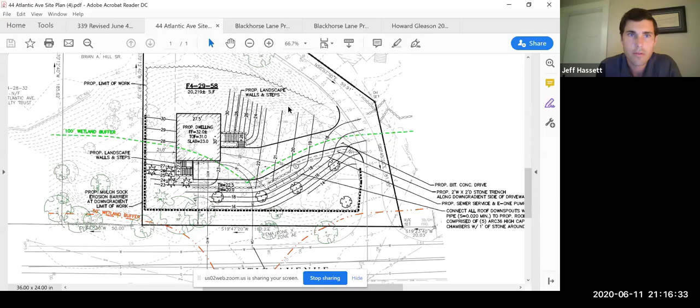So, moving the cursor around, this dotted line you see here is the 2 by 2 stone trench that's designed to capture any water that comes off the driveway and hopefully infiltrates into the ground going down the hill, completely separate from the water that's captured in the infiltration chamber from the house and the roof gutters, if we direct it over this direction.

That's correct, I'm not sure what he said there. I think he was reiterating that the stone trench along the driveway is designed to capture the water coming directly off the driveway and what would run onto the driveway uphill, and that the gutters and downspouts will trap the water that would hit the top of the roof, directed into the drywell chamber.

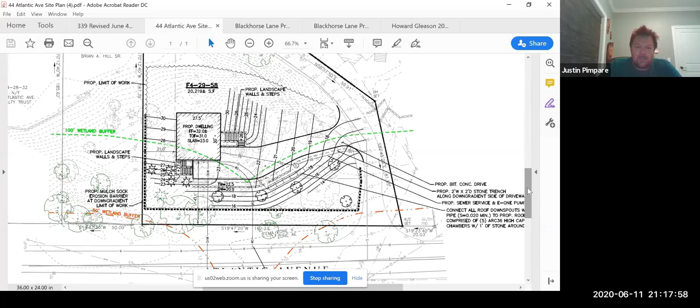Can we add more to that? Did we say that? No Jay, you're completely broken up. Difficulty here, not working Jay. Repeat yourself, I'm not working here. No, now you are, you have to repeat. Okay, can you hear me now? Yep, yep, can you hear me now?

All right, so where is 91 and 95 Atlantic Ave on this plan? It's on the other side. I'm going to put the plan back up. Is it near Whitehead? It's just to the north of Treats Pond. 91 and 95 are down the road to the north on the opposite side of the road, on the other side of the pond.

How far down the road are we talking about with this water flooding? This is 44. Pretty far - the first driveway, at 91, is 225 feet down the road. Okay, so that's like 3/4 of the length of a football field. Correct.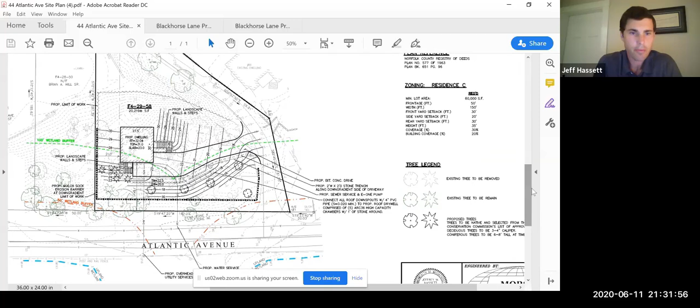Could you give me until Tuesday of next week? Yeah, I'd probably give you a week from today.

I'll take Eric. What do you think about putting a swale or something at the bottom before it hits Atlantic? I'd be much happier. He's going to double the size of the driveway trench, which I think is a good effort, and he's going to add 6 trees. If you look at the land there, Maryanne, along Atlantic Avenue, it's very steeply sloped and there's a lot of stone and ledge. I don't think there's room for a swale down below, I don't think that would be workable. Not without damaging trees, there's a lot of growth there. Yeah, it's tight.

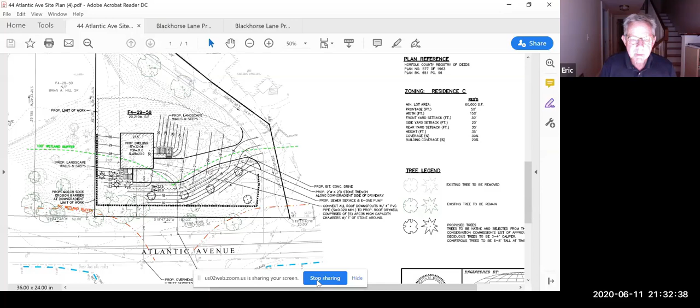Okay, any further comments? There's a stone wall along that property, are you going to be touching that? No.

Any further comment? Okay, so we don't need a variance on this one because there's no work done on the 50.

I will make a motion to issue an order of conditions for the project at 44 Atlantic Ave with one specific condition, that a revised plan be submitted to the Conservation Commission that meets the satisfaction of the conservation agent and the chair by close of business on June 18th, one week from today. The revised plan should include at minimum an addition of 6 trees located around the property, and a review of the width of the stone trench along the driveway with the intention of widening that. And if there are any other stormwater controls that can be placed on the site, please evaluate that at that time.

Are there any other conditions that need to be placed? Okay, do I hear a second on that motion? Second. Okay, motion and a second by Eric Eisenhower.

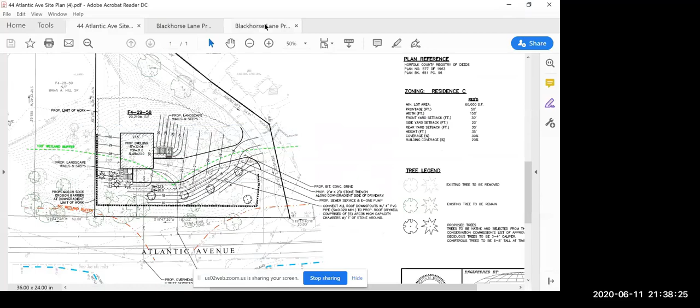I'm going to share my screen now. I know the commenter appreciates you hanging with us here - like some of us, it's getting late. I'm going to share a couple of things for the record to address the public comment. This is the 50-foot wetland buffer that goes along the area, and this is Supper Island out this way. As we discussed, there is no new work proposed in the 50-foot buffer zone.

Is that correct, Morse Engineering? On lot 1, which is the house on the right, there is zero work inside the 50-foot buffer. On lot 2, which is the house on the left, there's no new work proposed in the buffer, but we are restoring the existing pool house and patio. There are no new structures or new work outside of that existing area - no further encroachment toward Supper Island.

Okay, thank you for that. I'm going to jump back here. Greg, are you going to talk on this? I'll share my screen, and I figured it'd be best if you just walked us through. This was a letter submitted after the last hearing, and these are the revisions that were made. Is that okay with you, Jeff? Do you want to run through these, and then I'll pull up a site plan so you can further describe it?

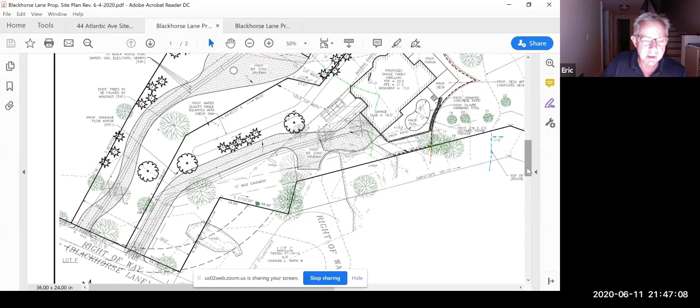Greg, I assume the metasequoia tree that was mentioned by Chris at our last meeting, that is going to stay now? Yes, it is. We do have a note on it that it would be pruned by an arborist, some of the lower branches, to help get around it with a driveway, but the tree is proposed to stay. The cursor's on it right now. I applaud you for that. Thank you very much. That's very good. Well done.

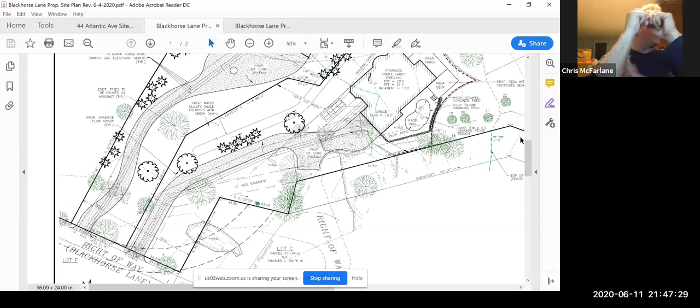No problem. And then just to note, the existing tree legend is here as well, which is very detailed. So thank you for that. Looks like an arboretum - black walnut. Quite a property. It is.

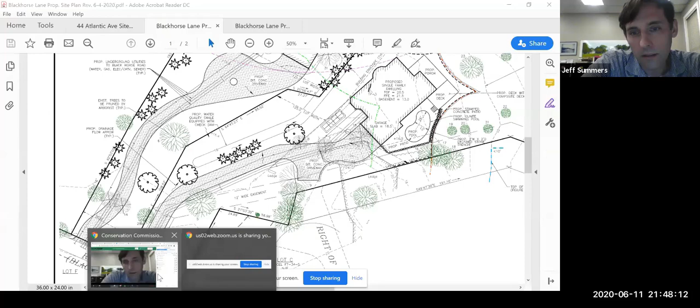Do we have any further questions from the audience with respect to lot 1? Not seeing it, Jeff. Not seeing any as well. Was that for me, Jay? I couldn't make out what you're saying. You're muted, Jeff, we can't understand you. I think he was asking if there were any other questions from the audience. No, there's no question from the audience. I don't see any further. Okay. Any further questions from the commission with respect to lot 1 only?

Okay, what do we need here? For lot 1, we need an order of conditions and a stormwater permit. We do not need a variance because there's no work being done.

Jay Pimpari would like to make a motion to approve and issue an order of conditions for the project at lot 1 Blackhorse Lane, with a specific condition that, looking at the diagram, there is a fine line on the 50-foot buffer zone. I'd like to condition that no motorized equipment, including excavation equipment or backhoes, be in the 50-foot buffer zone at any point in time. We discussed at the last hearing that you could work uphill of that for the proposed porch, etc. There's a retaining wall, so again, no excavation or heavy equipment in the 50-foot buffer zone at any time.

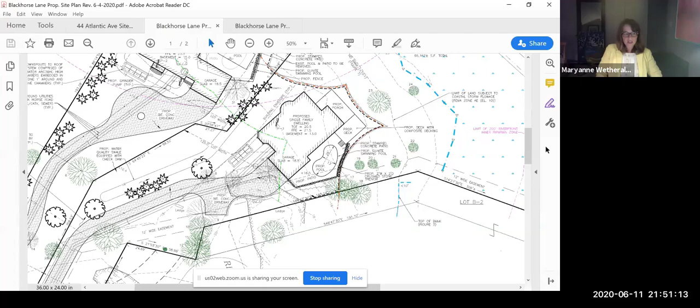Second by Eric Eisenhower. Roll call vote: Jay Pimpari, aye. Eric Eisenhower, aye. Chris McFarlane, aye. Maryanne Wetherald, aye. James Roseback, aye. Trish Grady, aye.

That vote passes 6-0. Okay, let's move on to lot 2. Let me move my screen over. I apologize, I'm sharing my screen and moving it so much. I'll try to get lot 1 a little more off screen and focus in here.

So for lot 2, I'll move it around to give you an idea. This is the 50-foot buffer zone going across, this is the existing pool house and existing patio area. There's a proposed pool going in. The home is well outside the 50 and almost outside the 100-foot buffer. Same situation as before, and thank you for bringing it up, Eric. There's an order of conditions previously registered on the site, stating there's to be no disturbance in the 50-foot buffer zone outside of the rehab of the existing pool house, patio, and discussion about the cesspool, etc. Giving that a quick overview, I'll turn it back over to you, Greg.

Discussion in that 50-foot buffer: you've mentioned every change we made in there. It's just additional notation regarding the existing pool house and abandonment of that cesspool. The last piece was changing the erosion control barrier, the bold dashed line, to be outside of the 200-foot riverfront zone, shown as the purple line right around there. Previously we had that running along the tree line, but now it runs along the inner riverfront zone.

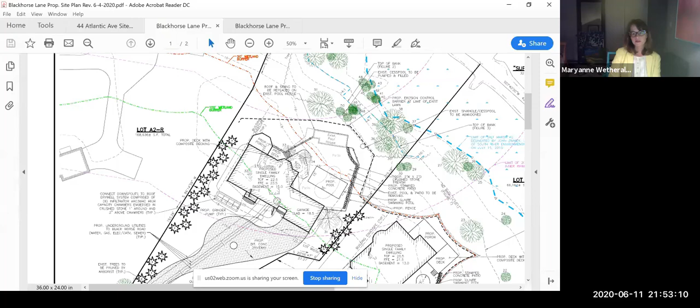It remains a very big patio, just an observation. Actually, what's proposed is slightly smaller than the patio that is out there today. There's a small portion, about 120 square feet, just to the left of the existing pool house, that gets cut off with the new fence delineating the pool.

Is this proposed fence only because the law requires a fence around the pool? Correct. So the fence would come along this way and around. Is this a fence as well? Yes, that's a fence as well, and the proposed fence almost mimics the existing fence. There's another line just underneath that proposed fence line. That pool fence isn't definitely being added, since Massachusetts law now allows an automatic pool cover instead. So are they definitely putting that fence in? Yes, there's an existing fence everywhere we're proposing a new fence.

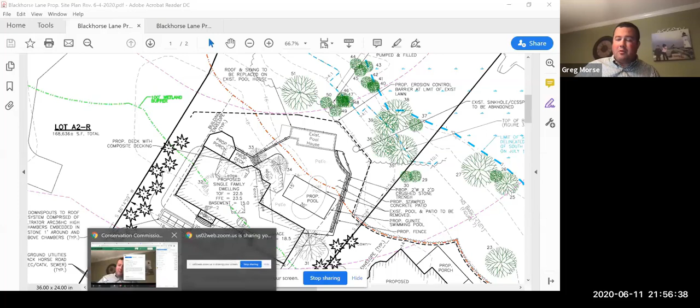Can you capture any of that? What we have proposed is where the patio is, along the edge of the proposed patio, we've added a crushed stone trench to promote infiltration. There's no infiltration device where the patio currently is. In addition, the patio is slightly smaller in size by about 120 square feet, so we have added that. And we've pulled the pool outside of the 50-foot buffer, when it used to encroach to about 47 feet from the wetland resource.

Any other comments? Okay, if I'm not seeing any additional comments from the audience, if there's anybody from the audience who would like to ask a question or provide a public comment, please do that through the Q&A. Any comment on this?

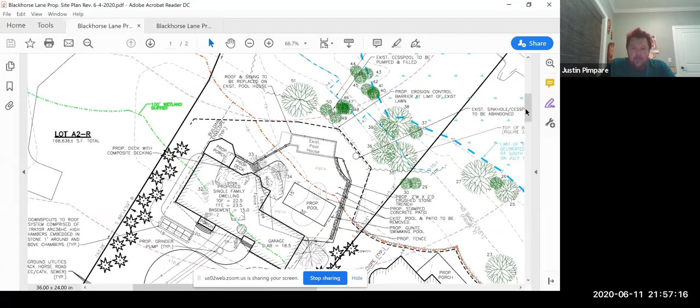So Jay, you're a little broken up there again. Not hearing any further comment, I will make a motion to... Okay, we can't hear your motion. Let's stop sharing my screen here. Can you hear me now? Yes, yes. Is that coming through? Can you hear me now? Yes, yes, all right.

Jay Pimpare, I'd like to make a motion to approve and issue an order of conditions for Lot 2 on Blackhorse Lane, with a specific condition that no work be performed outside of the silt sock or erosion control barrier, which is at the limit of the existing lawn now, as outlined on the plan with the proposed erosion control barrier. Do I hear a second?

Second. Unless there are no further comments or conditions on that, we'll take that to a vote. All those in favor, please say aye by roll call vote. Jay Pimpare, aye. Chris McFarlane, aye.